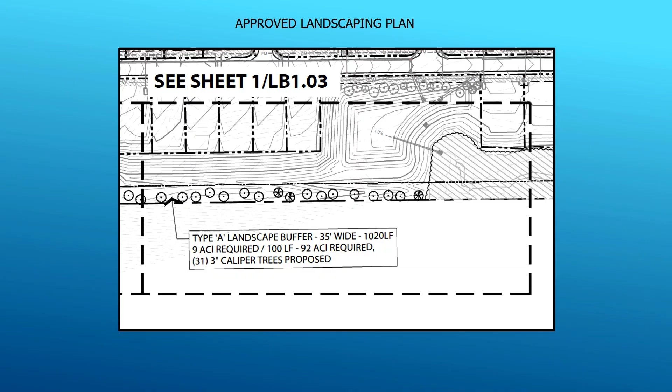Now there was a question about the landscape buffer, so I wanted to clarify that. This is the approved landscape plan. So when I initially made a comment about trees being planted and needing to be removed, they were up on the top of the berm, so they were not in line with the rest of the landscape.

And the issue there was roots growing and possible eventual potential failure of an earthen embankment. We don't like to see trees planted on top of the bank because it can weaken the berm, so I asked them to remove it.

So here's where the trees were supposed to be planted. And the reason I bring that up is we got a letter requesting replanting trees. I think the issue was they were not planted in the correct place to begin with. Aaron can correct me if I'm wrong, but my understanding is those need to be placed in that configuration there at the toe of the slope.

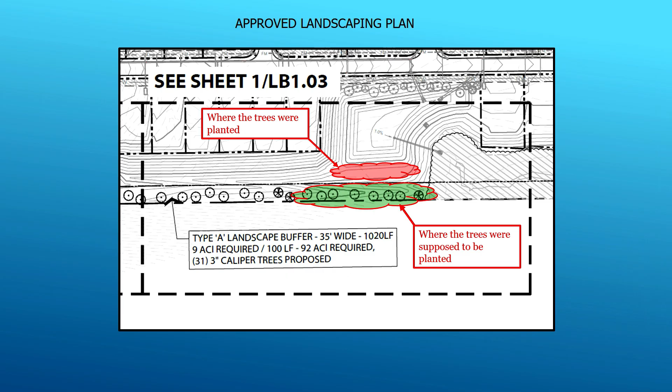Moving to section 1, we haven't talked a lot about this, but there's some ponds that need some work. Detention pond 2—it's pretty swampy, there's some cattails, and that needs to be regraded and drainage repaired. Detention pond 1 needs a lot of work, and we've met with Brent and the engineering team about this.

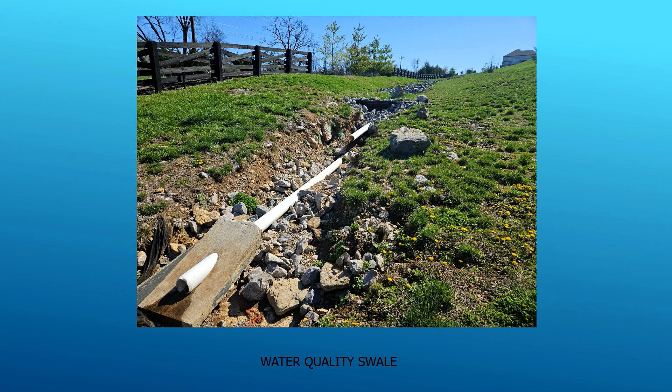This is the water quality swale. It's not supposed to have exposed pipe, but that's on the list of things to repair.

So just to summarize, because I know there's a lot of curiosity about where we are with this—there are currently 27 open issues: road core sample, which Brent touched on, geotechnical, regrading slope, and pond 5 in section 2. In section 1: the trees and the landscape buffer, the core samples, ponds 1, 2A, 2B, 2D, some slope regrading, and the water quality swale. Those are some of the big issues.

So I just kind of put together some ideas, some recommendations. I think they're in line with what he's said here. But one thing is we need to get some equipment on site.

Hopefully by the next meeting, April 9th, there'll be some active construction on site. May 14th, I would like to see the pond grading complete so we can get some stabilization performed. By the 11th, the road should be done, the pond should be stabilized, the water quality should be complete, and the trees should be planted.

And by July, I would hope that the majority of the issues are closed out, and that we have the engineering geotechnical core reports addressed. That's kind of what I would hope to see. So I just wanted to prepare that for you guys to see, and that's where we are with that.

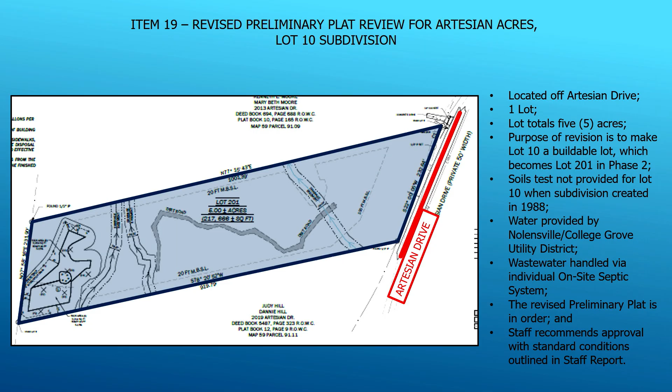Thank you, sir. Any discussion on item 19? Motion to approve per staff. Do I have a second? Go ahead, Don. It was unbuildable the first time - has it become buildable now because they've gone in and found out they can put a septic system in there? Yes, sir, that's correct. Okay, thank you. Do I have a second?

We have a motion and a second. All those in favor say aye. Aye. All those opposed? Motion passes.

Moving on to item 20, preliminary plat review for Log Valley Trail large lot easement subdivision, Lot 3, containing one lot on 16.21 acres, located off Log Valley Trail in the 1st voting district.

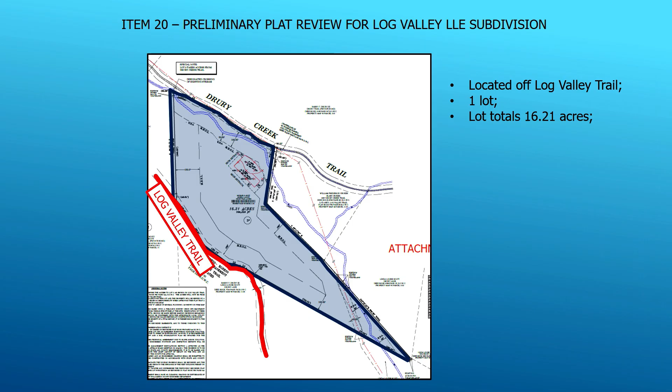Thank you, Mr. Chairman. This project is located off Log Valley Trail, shown in the red. It consists of a single lot. The lot totals 16.21 acres, shown there in the blue-gray. The National Park Service is unwilling to grant an easement from Drury Lane.

The purpose of this plat is to change access from Log Valley Trail in red to Drury Creek Trail in yellow up at the top. Water will be provided by an individual on-site well. Wastewater will be handled via individual on-site septic system, and the Department of Sewage Disposal Management has approved the request. Staff recommends approval with standard conditions outlined in the staff report.

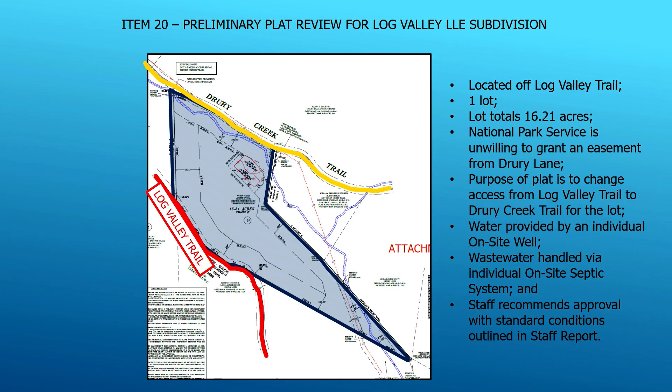Thank you. Any questions on item 20? Yes, sir - my question would be on how they're going to cross the creek or that stream of water through there.

They'll be able to handle it if they cross it at a 90-degree angle, I think that's correct, isn't it? Yeah, there were some previous approvals by the Stormwater Appeals Board as far as creek crossings and driveways that would be required, so that's going to be addressed with the building permit. Thank you.

Anything further? Do I have a motion? And a second? I have a motion and a second. All those in favor say aye. All those opposed? Motion passes.

Moving on to preliminary plats, item 21 was deferred. Item 22, preliminary plat review for the Arbors at Leiper's Fork subdivision, Phase 2, containing 16 lots on 379 acres, located off Hargrove Road in the first voting district.

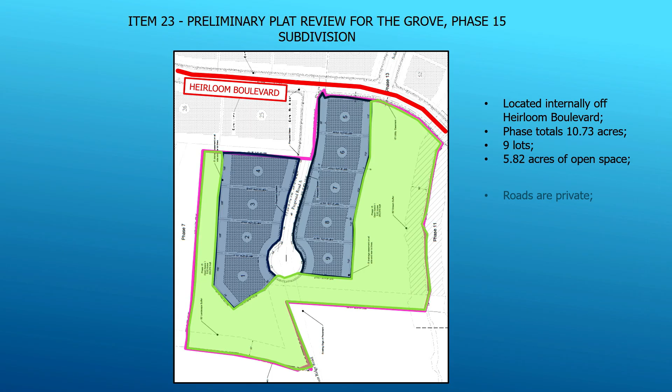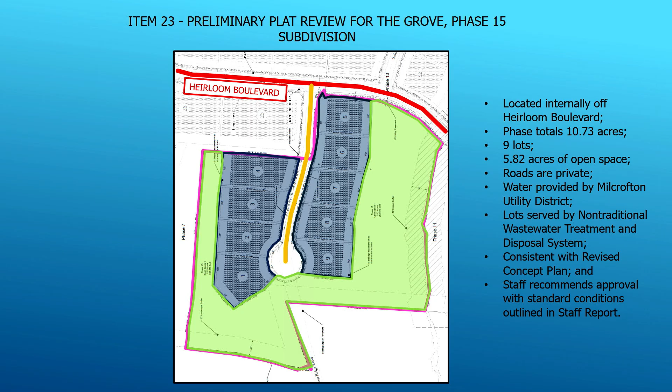This phase total is 10.73 acres. The phase boundary is shown in pink. Consists of 9 lots, shown in navy blue. This will have 5.82 acres of open space, shown in green. Roads within the development are private. Water is provided by Milcrofton Utility District. Lots are served by a non-traditional wastewater treatment and disposal system. The preliminary plat is consistent with the revised concept plan, and staff recommends approval with the standard conditions outlined in the staff report.

Thank you. Any questions on item 23? Just a question for my information: how many phases are there? Does anyone know, like historically? This is phase 15, I'm just curious how many more there are. Do we know? Yeah, we're close.

Adam Sager with Dale and Associates: I think this is the last phase for residential lots, so yeah, about ready to close it out. Okay, thank you. Yep.

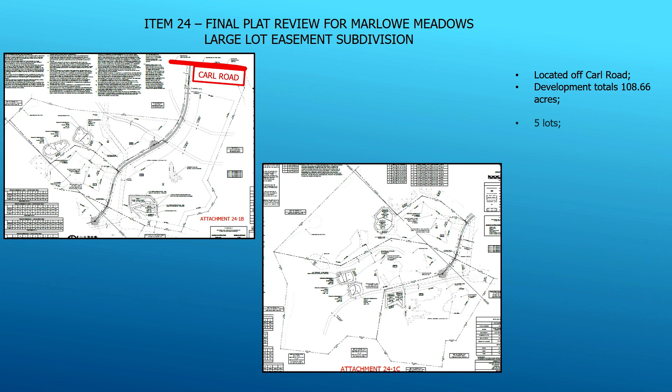Staff: This project is located off Carl Road, as you can see in red on the upper left inset. The development totals 108.66 acres and consists of 5 lots, shown in blue-gray. Lots will be accessed by an access easement, shown in yellow on both insets. The resource protection standards have been met.

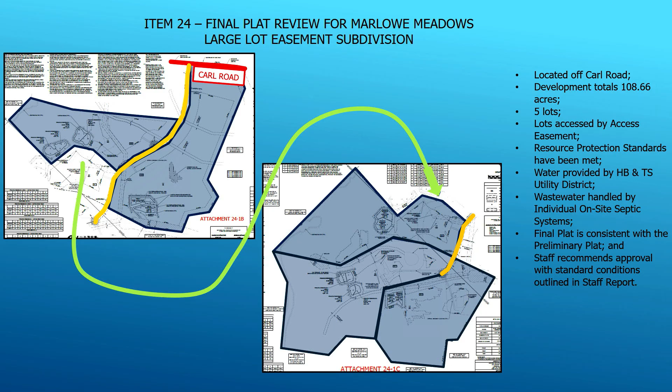Water will be provided by HB and TS Utility District. Wastewater will be handled by individual on-site septic systems, and the Department of Sewage Disposal Management has approved the request. The final plat is consistent with the previously approved preliminary plat, and staff recommends approval with standard conditions outlined in the staff report. Any questions on item 24?

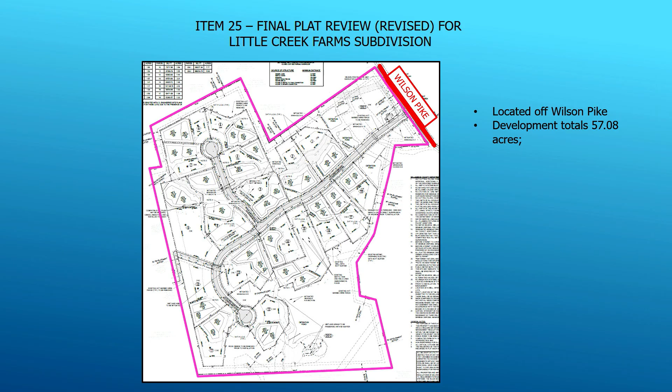Moving on to item 25, final plat review revised for Little Creek Farms subdivision containing 18 lots on 57.08 acres located off of Wilson Pike in the 4th voting district. Staff: The property is located off of Wilson Pike, shown on the top right of the screen in red. The development totals 57.08 acres in size and contains 18 lots, shown in blue.

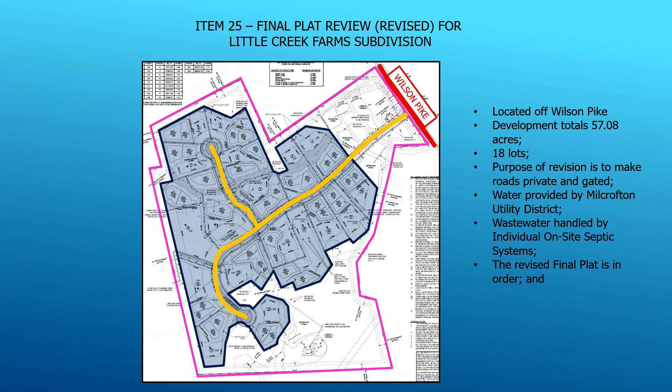The purpose of this revision is to make the roads private and gated. The roads are shown in yellow. Water is provided by Milcrofton Utility District, and wastewater is handled by individual on-site septic systems, which the Department of Sewage Disposal Management has approved. This revised final plat is in order, and staff recommends approval with standard conditions outlined in the staff report.

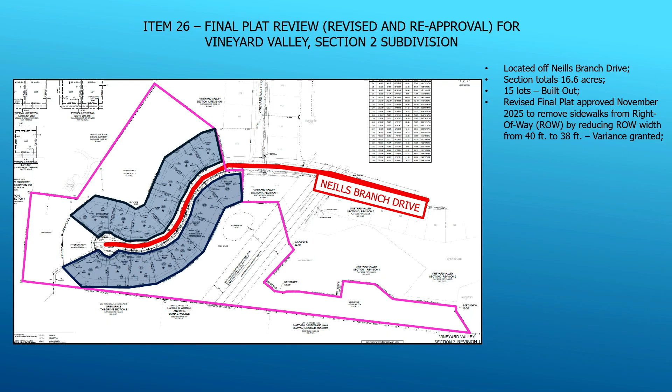The section totals 16.6 acres in size and contains 15 lots which were built out, shown in dark blue. This revised final plat was approved in November 2025 to remove sidewalks from the right-of-way by reducing right-of-way width from 40 feet to 38 feet, and that variance was granted.

This revision requires the signatures of all lot owners within the section, and attachment 26-3 describes steps the HOA has taken to acquire all signatures. All owners agree to sign the plat except for the owners of lot 208. Since the owners of lot 208 did not sign, the right-of-way shifted for all other lots, reduced to 38 feet, while lot 208 will remain at 40 feet. Water is provided by the Milcrofton Utility District. Lots are served by a non-traditional wastewater treatment and disposal system. The revised final plat is in order, and staff recommends approval with the original conditions outlined in the staff report.

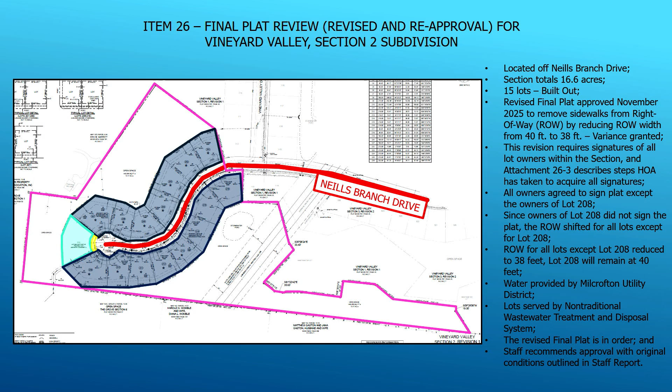Thank you. Do we have any discussion or questions on item 26?

Yes, sir. What does it whittle it down to as far as the width of the sidewalk? The sidewalk in the plan I saw was 4 feet, and the 40 to 38 is taking 1 foot off each side, right? I believe it varies somewhat, Mr. Chairman, but I think it can go down to no less than 36 inches. Do we know in that area?

Can the applicant step forward?

Amanda Reed, Pape Dawson. So the lots, there's only sidewalk on one side of the road, and so the lots that are affected on one side, the right-of-way was reduced by 2 feet on that side, going from 40 to 38 feet overall. So it's not on both sides, it's only directly affecting lots that have the sidewalk. But since it's a requirement for everybody to sign the plat, all of the lot owners with the exception of the one lot have signed.

But I guess, do we know in that particular lot? Oh, that particular lot. So they are going to reduce that sidewalk to 36 inches, just on the front of lot 208. And that'll bring it outside of the right-of-way and strictly onto the lot. So that should still comply with ADA requirements.

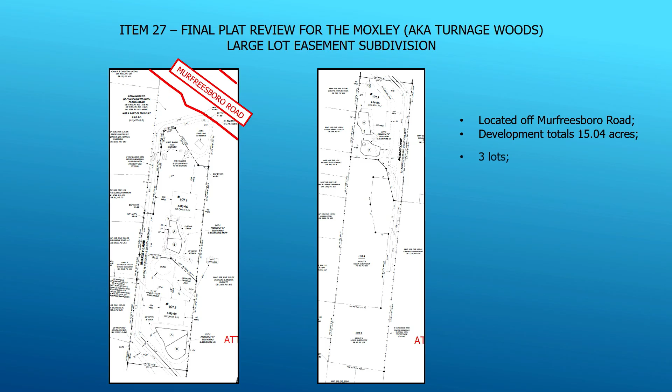Moving on to item number 27, final plat review for Moxley Large Lot Easement Subdivision, AKA Turnage Woods Subdivision, containing 3 lots on 15.04 acres located off Murfreesboro Road in the 12th voting district. This project is located off Murfreesboro Road, as you can see in red in the left inset. The development total is 15.04 acres and consists of 3 lots, as you can see in blue-gray. Lots will be accessed by an access easement shown in yellow.

The resource protection standards have been met. Water will be provided by Milcrofton Utility District. Wastewater will be handled via individual on-site septic systems, and the Department of Sewage Disposal Management has approved the request. The final plat is consistent with the previously approved preliminary plat, and staff recommends approval with standard conditions outlined in the staff report.

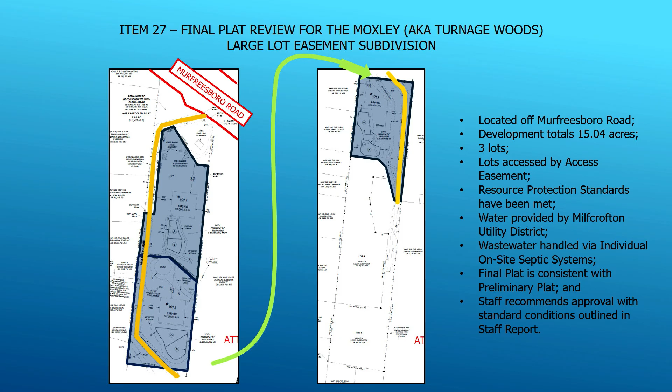Thank you. Any questions on item number 27? I have a motion. Do I have a second? We have a motion and a second. All those in favor say aye. Aye. All those opposed? Motion passes. Any further business? Hearing none, motion to adjourn. Adjourn.